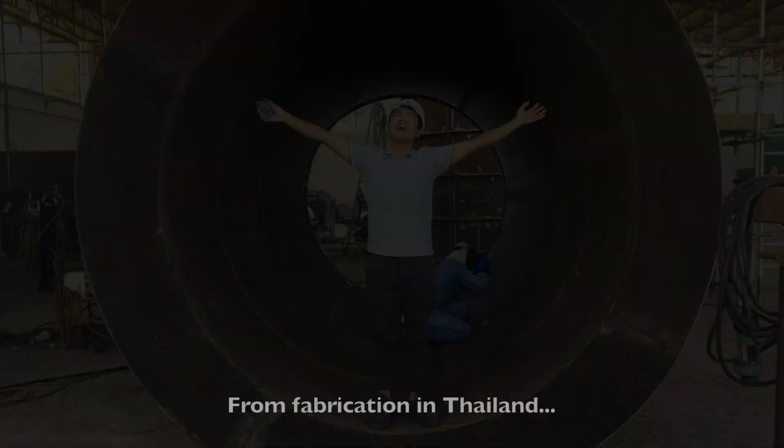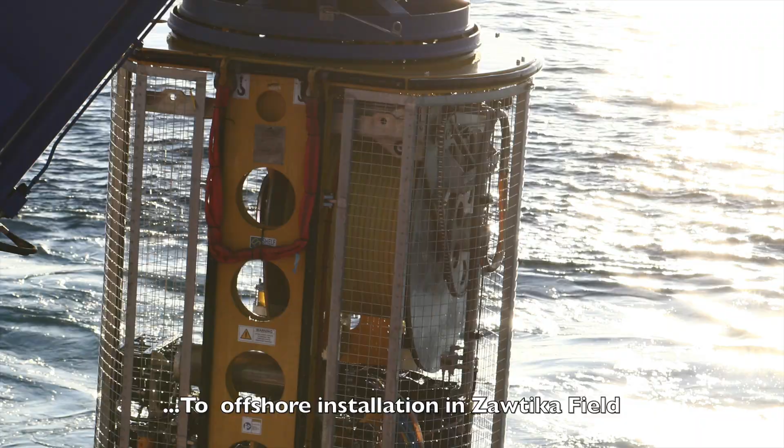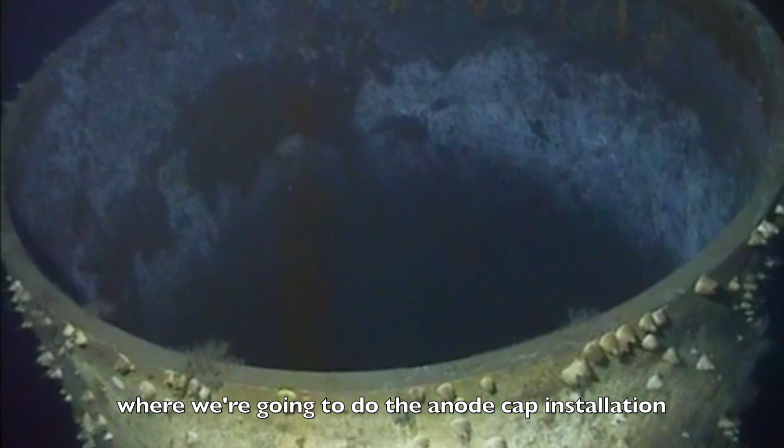In this stage, we relocate the ROV to the cluster of piles on leg A2, where we're going to do the anode cap installation.

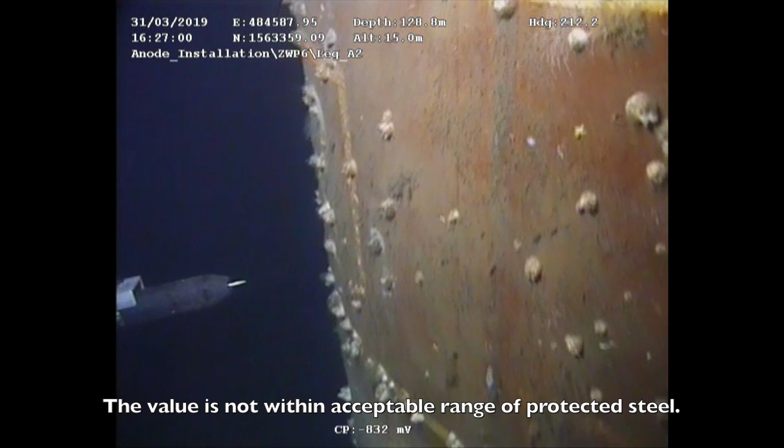Prior to installation, ROV obtained a CP reading of -832 millivolts. This value is not within the acceptable range for protected steel.

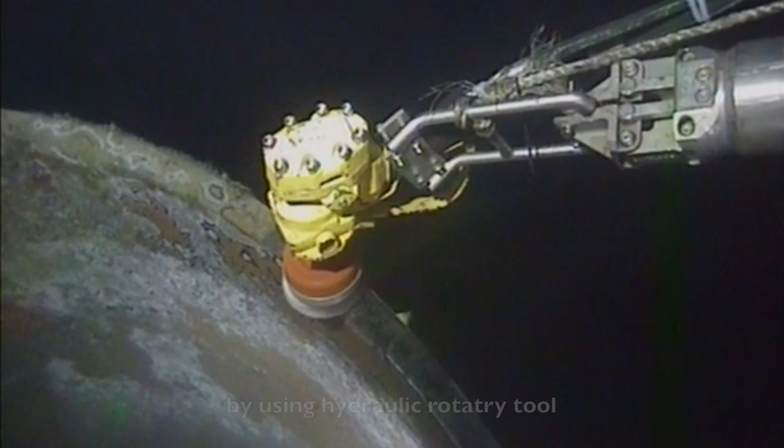Cleaning commences on top of the pile using a hydraulic rotary tool. This will ensure CP continuity after installation between the pile and the anode cap.

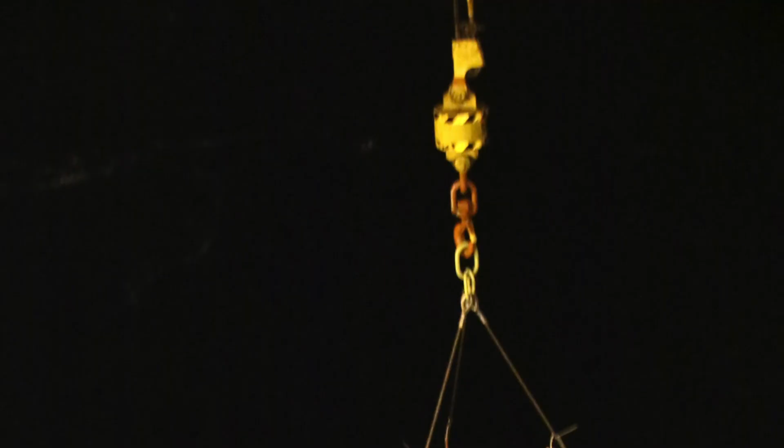When preparation steps are completed, the anode cap is deployed underwater and placed onto the pile using the vessel crane and the vessel's dynamic positioning system.

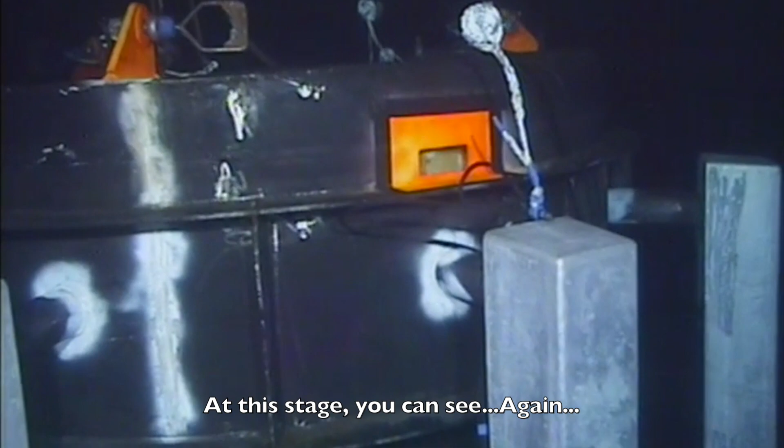In this third viewport, at this stage, you can see again the pin pile appears to be visible, indicating that the anode cap appears to be resting securely and perfectly on top of the pin pile.

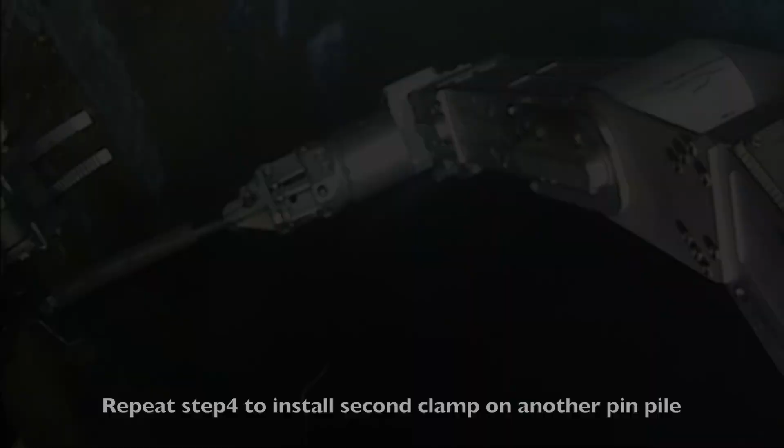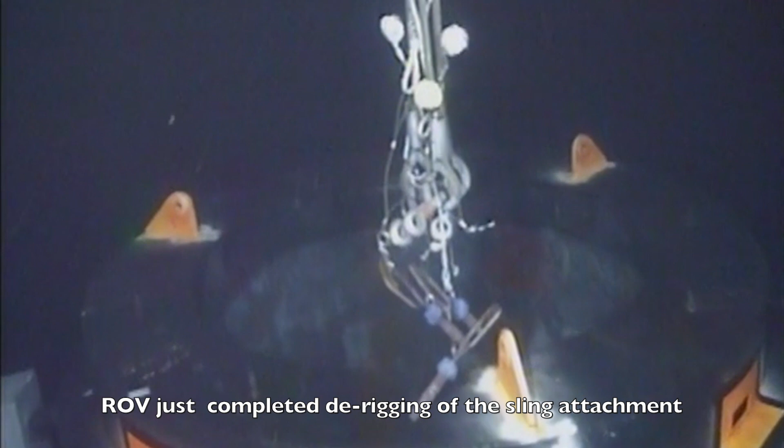We just completed the de-rigging of the slings attachment on top of the anode cap, and now you can see all the slings reeling in from the bottom towards the surface.

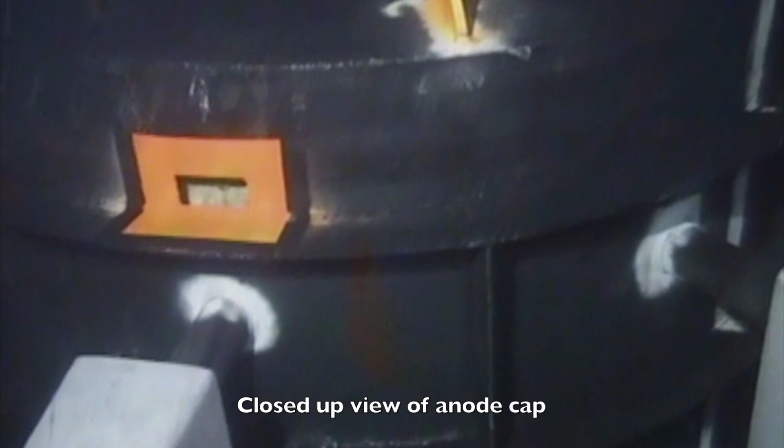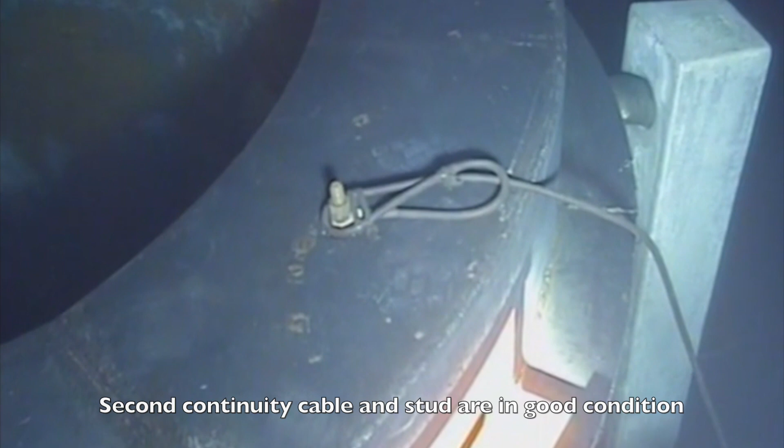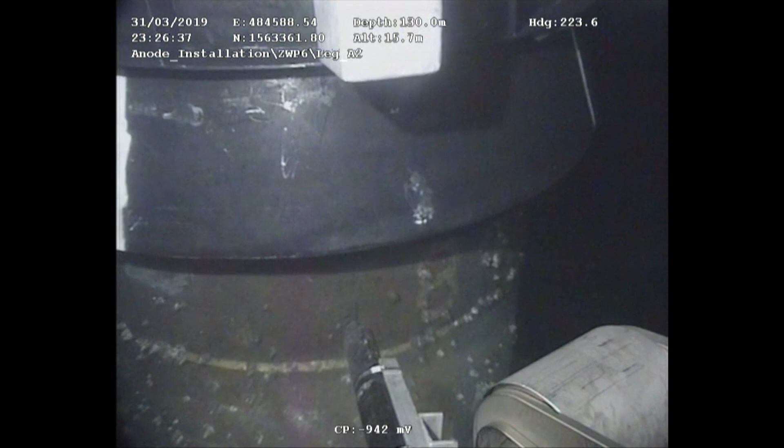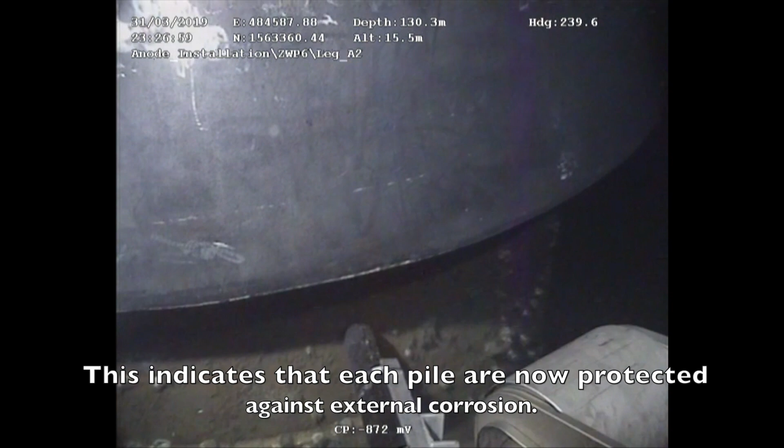After installation, CP readings immediately improve on each pin pile. The values obtained are now within the acceptable range between -850 millivolts to -1100 millivolts. This indicates that each pile is now protected against external corrosion.